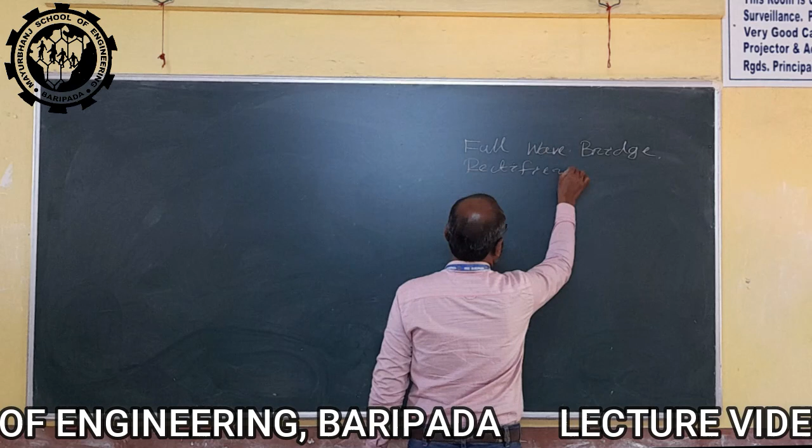Already we have discussed one kind of full wave rectifier, that is the full wave center tap rectifier. In spite of having one kind of full wave rectifier, we are going to discuss another one. Why? Because in that particular center tap kind of full wave rectifier, we have some sort of drawbacks. What are those drawbacks, we will discuss later on.

One major drawback I would like to bring before you is that in case of full wave center tap rectifier, during its construction, we have used a special kind of transformer called a center tap transformer. We require to construct a full wave center tap rectifier using this transformer.

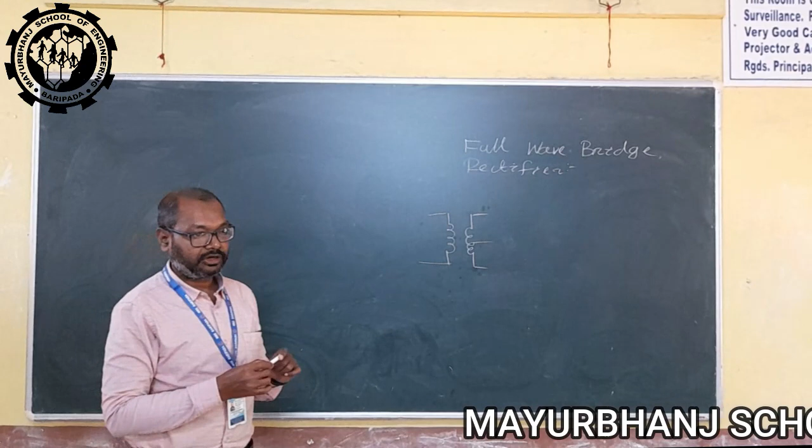In this center tap kind of transformer, we require a tap from the mid of the secondary winding of the transformer, which is quite difficult to manufacture. If we have a coil and anyone asks you to tap exactly from the center point of that coil and extract a point, it is quite difficult, because the coil is wounded.

It is wounded like a structure, and it is quite difficult to point out which point is actually the center point. If that center point is not found out properly, then on the secondary side we won't be able to get the same kind of voltage on either side of the tapping position. So for getting a perfectly centrally tapped position on the secondary side, we have to go through a very sophisticated process, which makes this transformer very expensive, so this kind of rectifier using the center tap transformer is not at all cost effective.

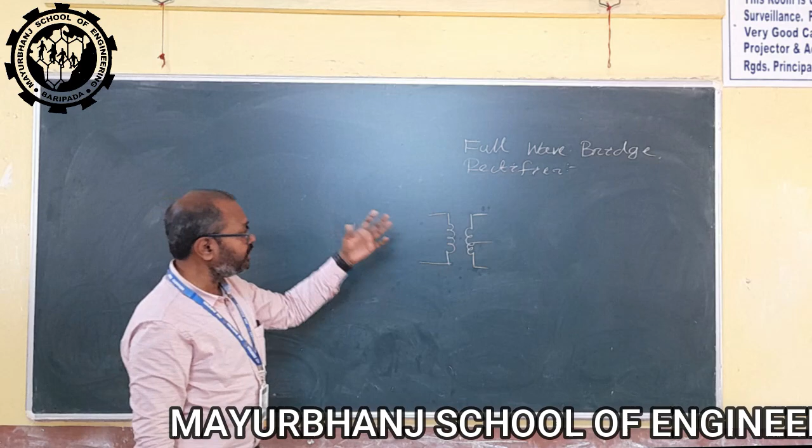For that reason, we are going for another kind of full wave rectifier, where we have to replace this center tap transformer with a normal transformer. So the objective behind this full wave bridge rectifier is to replace the center tap transformer from its construction. For this, we have to go through its circuit diagram, or you can say the constructional view.

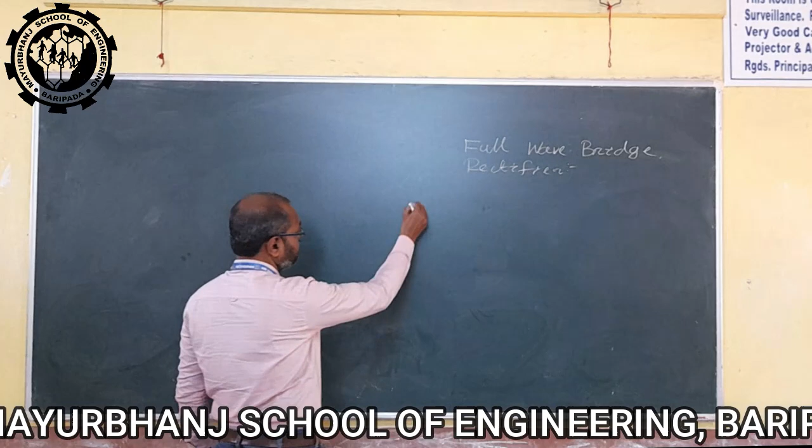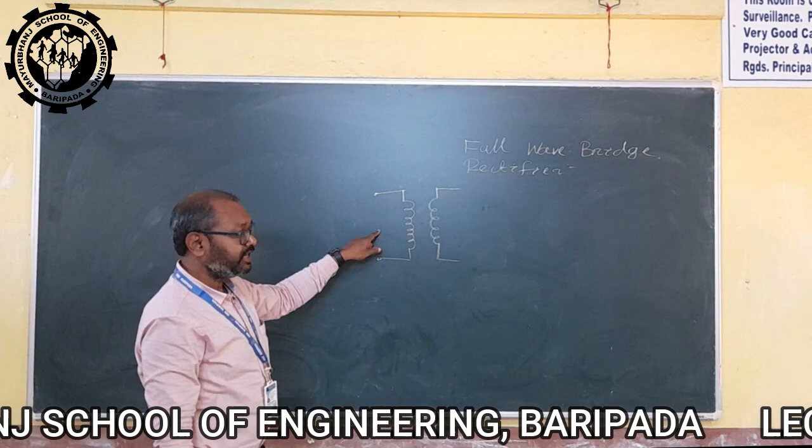Usually in a rectifier, in the first stage we have a step down transformer. In case of a step down transformer, whatever voltage we give in the primary side, we get a lesser voltage in the secondary side. Those transformers are called step down transformers. The relationship between the number of turns in the primary side is always greater than the number of turns in the secondary side of the winding. So this kind of transformer we have to use here. Let's say this is a step down transformer, we are using here.

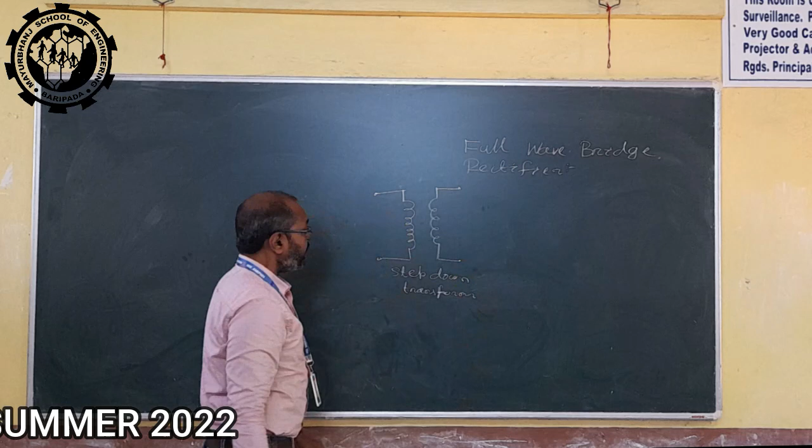Now this step down transformer has to be connected with a bridge. That bridge is constructed with 4 diodes, meaning the normal p-n junction diode. We have to use 4 diodes to construct that bridge. The bridge looks like this. See, these are the 2 positions, and here I have to draw the bridge of the diodes. These are the 4 positions.

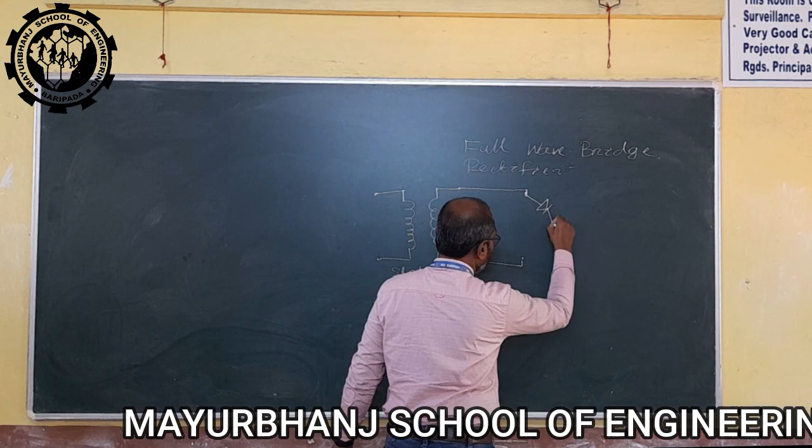Now the fashion of connection of these 4 diodes is like this. If I am connecting a diode like this at this particular point of the transformer, another diode I have to connect in the same direction.

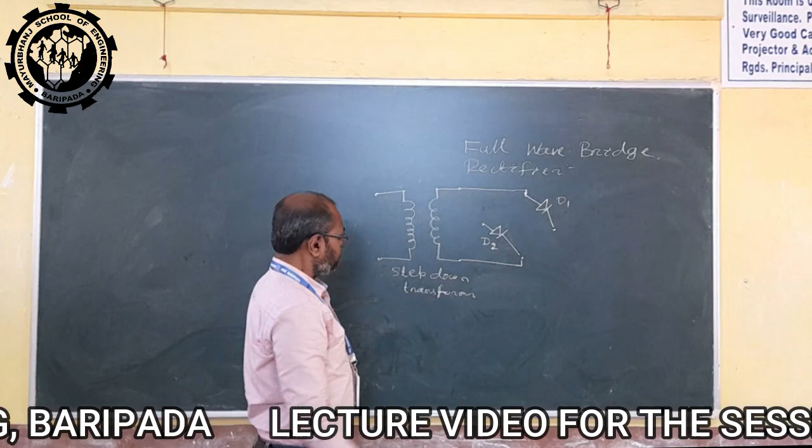Now, and I can put the name also, like this is D1 and this is D2. Then in the other two arms of the bridge, I have to connect two more diodes in the other direction.

And you just put the name, let's say this is your D3 and D4. Let's say this position is A and this is B.

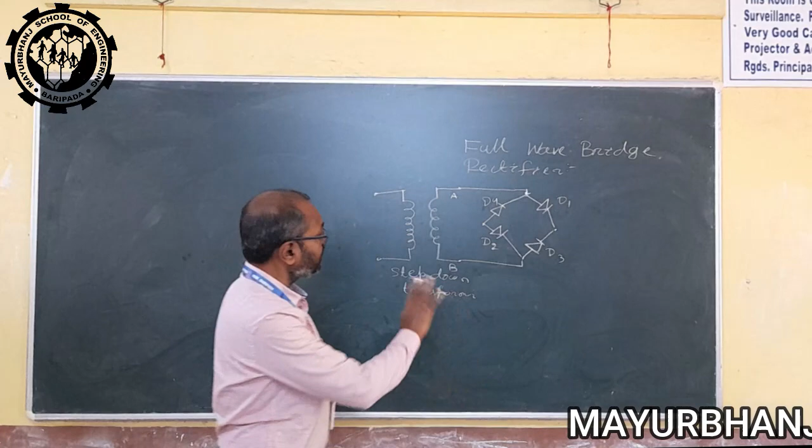So we can say this is the bridge rectifier overall, and now the primary voltage, whatever voltage we are applying here, this is an AC voltage. Let's say this is 220 volt or something like that, and 50 hertz.

The supply whatever we have, we have a step down alternating voltage here, depending upon the rating of the transformer. That may be 5 volt, that may be 12 volt, that may be 9 volt. But it depends upon the rating of the transformer.

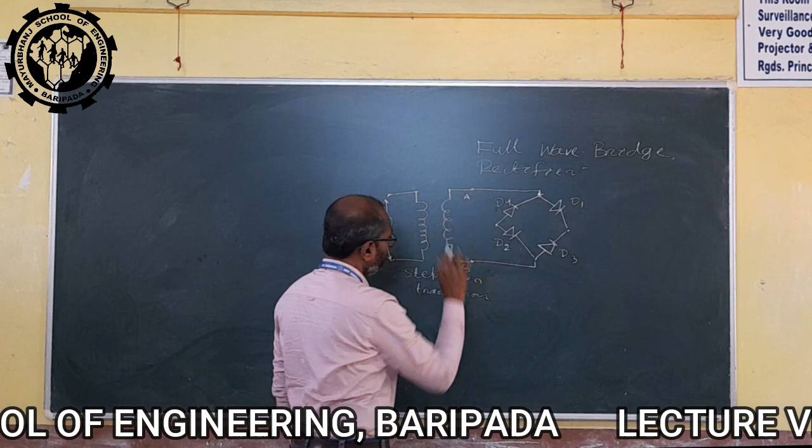Now, this step down AC quantity is available here between these two points A and B, which is applied in these two nodes of the bridge. Now, between these two nodes, I have to connect the load.

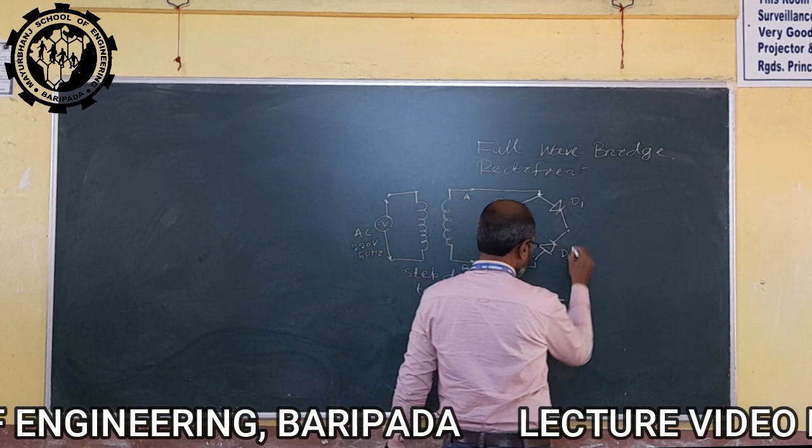Load means the rectified output that is meant for the load, which has been driven by this particular rectified output. This load has to be driven by this output. So let's say this is a resistive load and this is RL, named as RL.

Now this is the constructional feature. Here I have a transformer, step down transformer. This is the bridge, constructed by 4 diodes D1, D2, D3, D4. And between these two positions I am connecting the load, that is RL, that is resistive in nature.

Now this is the constructional feature, you can say the constructional view of our full wave rectifier, or full wave bridge rectifier. Here we are replacing the center tap transformer. We are not using the center tap transformer here.

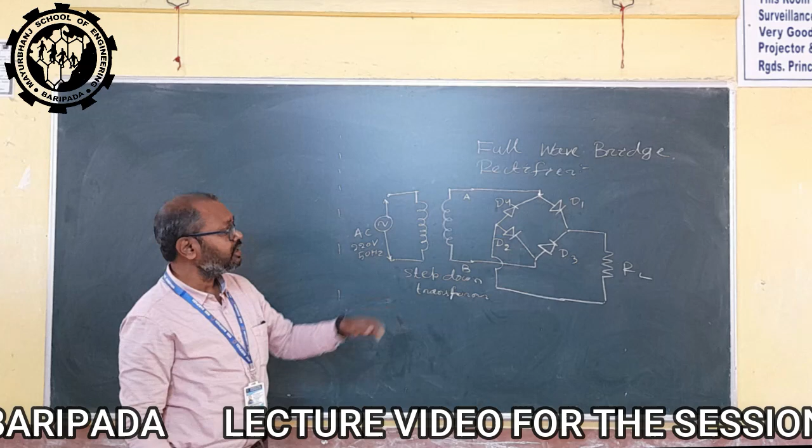But we are taking two more diodes, we are using two more diodes. If we compare the cost of two diodes, then that is very nominal.

And if you compare the cost of the center tap transformer and the cost of two additional diodes, we can find that using two more diodes is quite cost effective as compared to using a center tap transformer for constructing a bridge rectifier. So in this case we can say this is a cost effective option and it works in a better way.

And one more thing we can say, this circuit is a little bit complicated because two more diodes are available there, but we can memorize that connection pattern and we can exactly draw it on our papers.

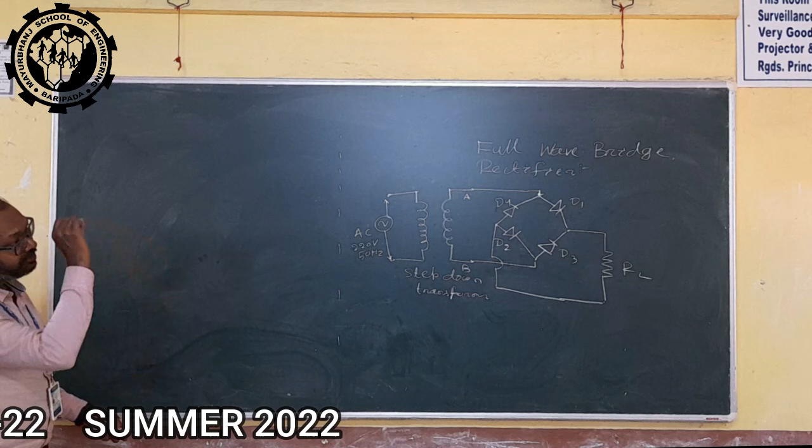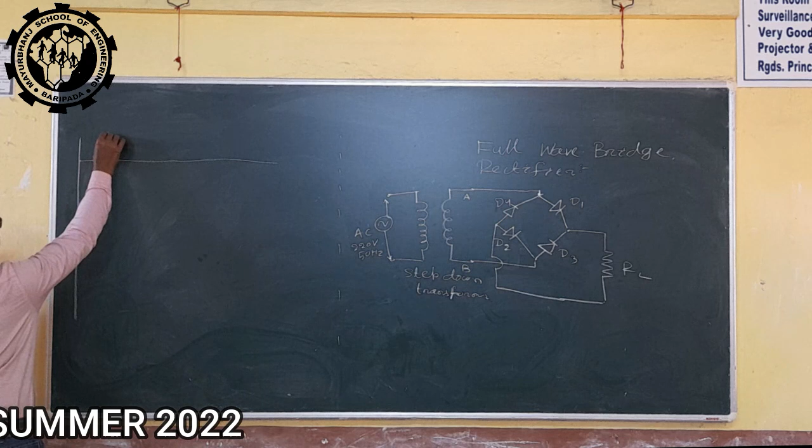Okay, now we have to move to the waveform, or you can say the working principle of this particular bridge rectifier. Now during the discussion of this bridge rectifier, we have to take the help of these sinusoid waves, or the alternating quantity, to analyse what is the pattern of output we are getting across the load, what actually we are applying and what actually we are getting.

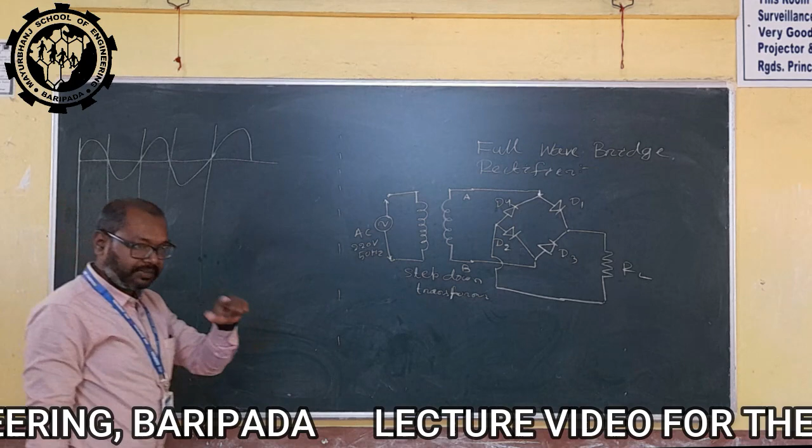Okay, now in this case, let's say I have an alternating quantity like this, or you can say an alternating current. Now we know very well that one particular quantity is said to be alternating if it is a time varying quantity. If it is a time varying quantity, its value will be changed according to the time, its amplitude as well as direction. It will change its amplitude as well as its direction.

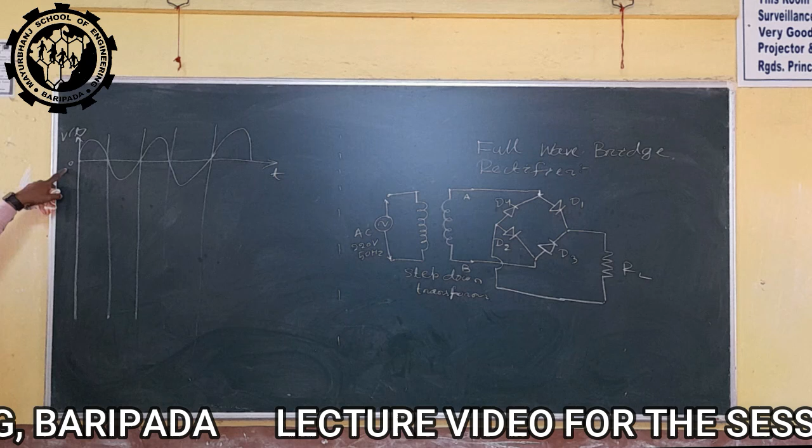Now if we analyze this signal, or if we consider this signal, let's say this is your time axis and this is a voltage signal V of t, and with respect to this time, let's say it starts at 0. From this to this, the level of the voltage is getting changed. From 0 to this particular position it will attain its maximum value, then it will come again to 0. And from this position it will alter its direction.

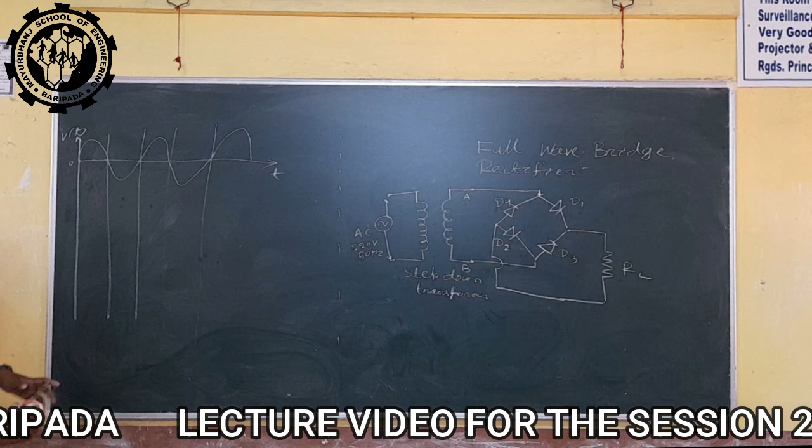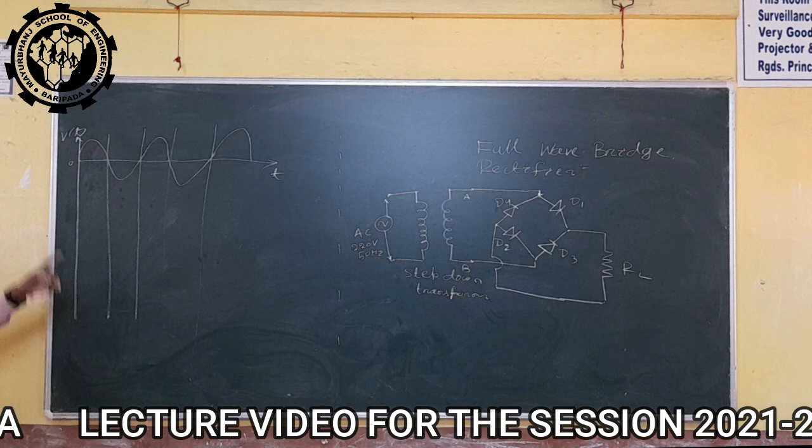Okay, so in this case we can say this particular quantity will alter its amplitude as well as its direction. That's why it will be considered as an alternating current, or alternating voltage, or alternating quantity. Otherwise you cannot say that is an alternating quantity. Both the changes will be reflected over there in its waveform, voltage or amplitude, as well as the direction.

Now this particular voltage, let's say applied here in this transformer, and we get a step down kind of output here, and that is also alternating in nature. This step down voltage is fed to these two positions, these two points of this diode bridge. Now when this particular step down and alternating quantity appears here across these two positions, what happens? This we have to analyze.

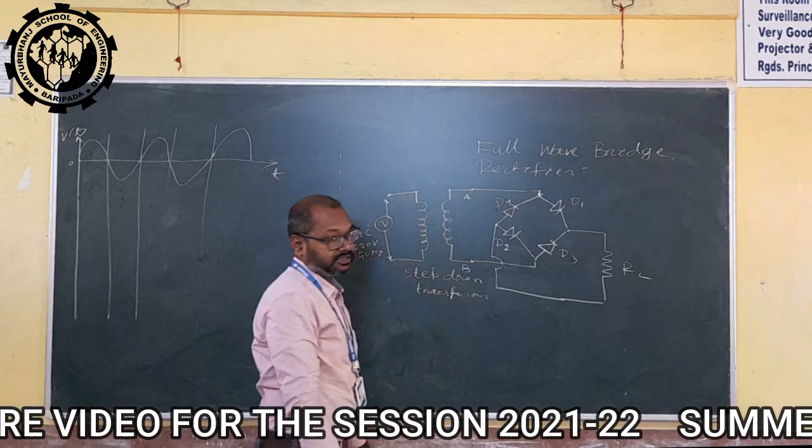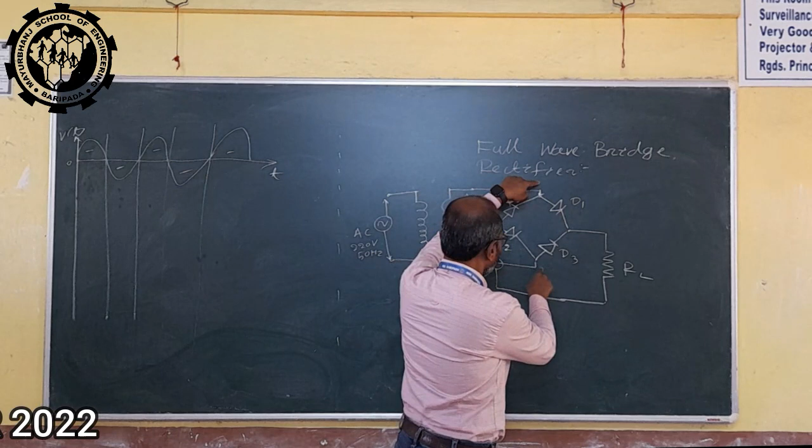See, this step-down alternating quantity has a positive half cycle, and again has a negative half cycle. Then it is again positive, then negative, then positive, and it will continue. Now for a particular instant of time, we can say it will approach these two positions with a positive voltage, and at the very next instant of time, at these two particular points we will get a negative voltage, isn't it?

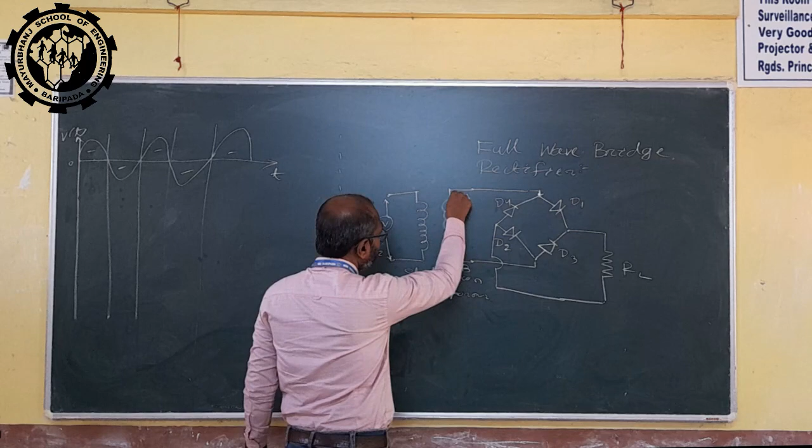So for the positive half cycle we can say node A becomes positive, and node B becomes negative, and this particular voltage appears here. Now at the negative half cycle we can say node A becomes negative and node B becomes positive, as it will change its direction.

So now what happened here? During the positive half cycle, the positive voltage appears here at A, and it is negative at B.

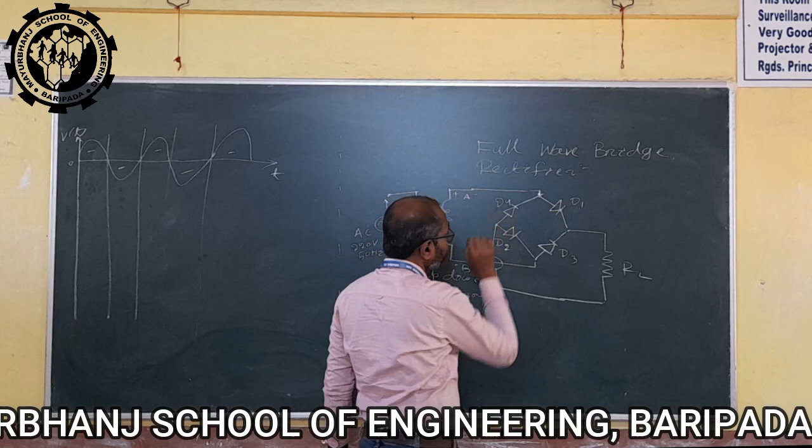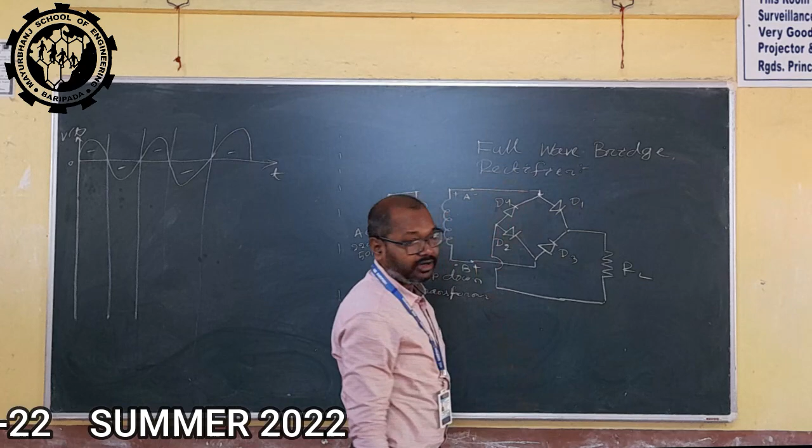Now when it becomes positive, if we take these two diodes into consideration, the anode of diode D1 is connected to this particular point and it will experience a positive voltage. But the cathode of diode D4 is connected to the same node. Now here the cathode experiences a positive voltage. So when the anode of diode D1 experiences a positive voltage, the cathode of diode D4 also experiences a positive voltage.

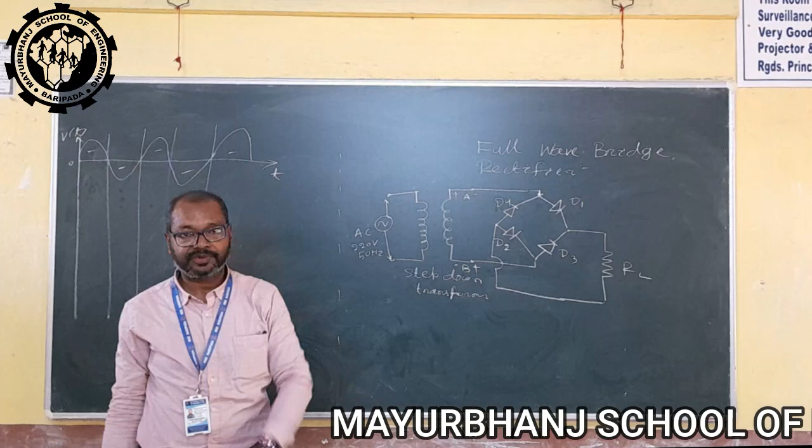So by taking this case into consideration, at this particular time, diode D1 with respect to this positive voltage becomes forward bias, whereas diode D4 becomes reverse bias. And we know during forward bias, a diode behaves as a short circuit. So the current, whatever voltage is available here, will start to conduct through diode D1, and diode D4 behaves as an open circuit.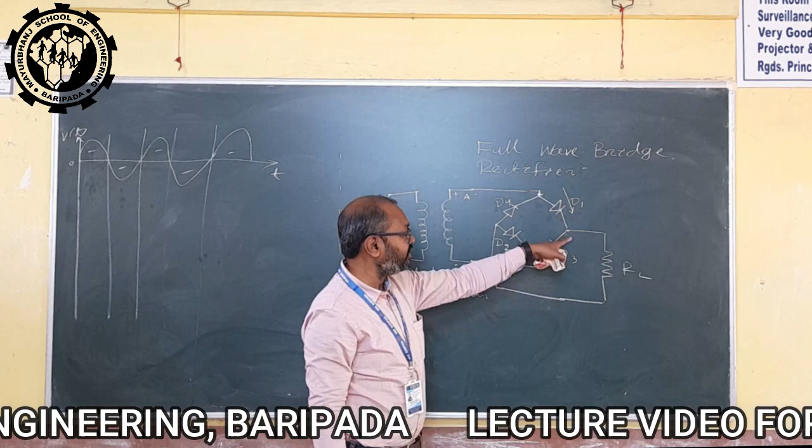Now this particular current arrives here. When it arrives here, it finds that the cathode of diode D3 is connected to this position, and since the cathode of diode D3 is connected to this position, diode D3 becomes reverse bias and possesses infinite resistance, or behaves as an open circuit. So when diode D3 behaves as an open circuit, the current will start to flow through the load resistor and continue this path up to this node.

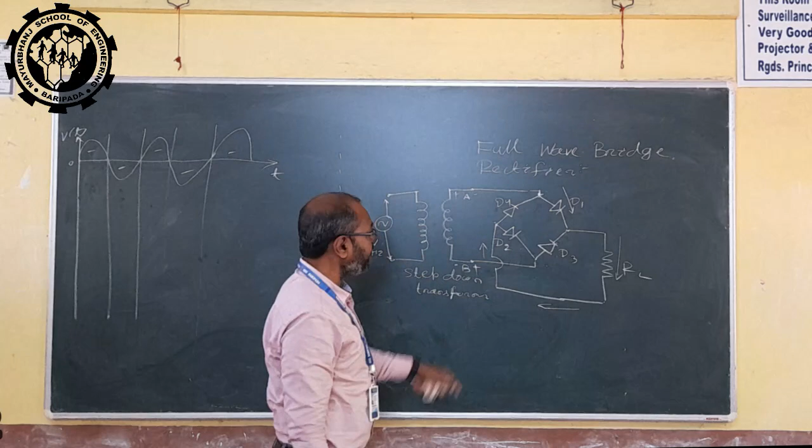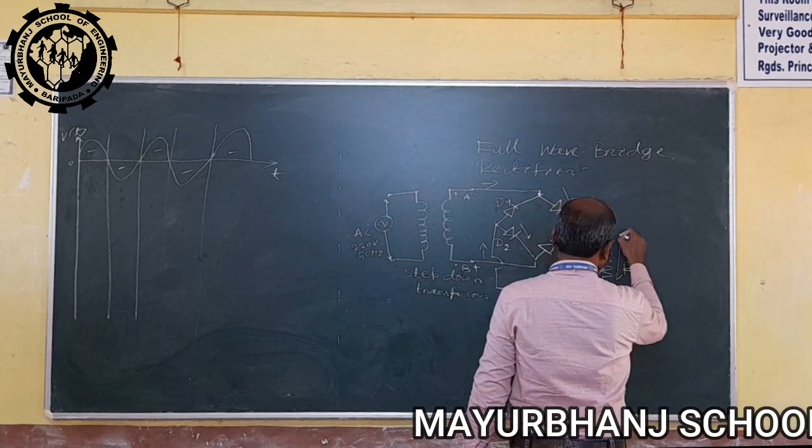Now when it arrives at this node, the current will start flowing from here. The current started from here, and from this it will go through D2 and arrive at point B. Now the circuit gets completed. The current started from the positive terminal and ended at the negative terminal, and the current completes its path, and we can get a direction of current through this load, that is, in this direction.

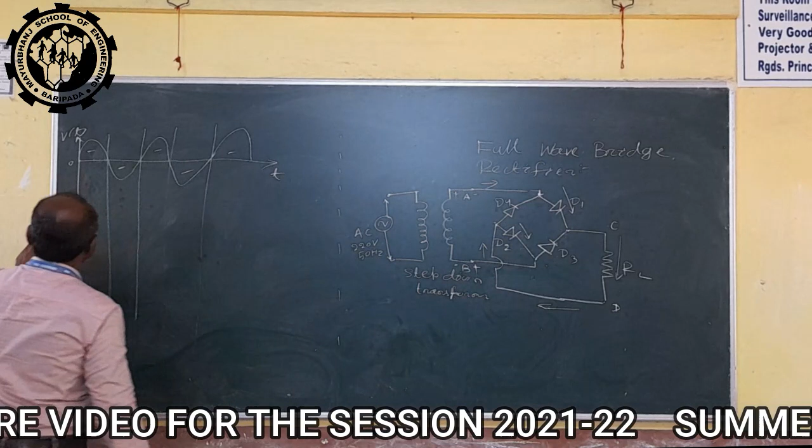Let's say we put some names here — let's call this C and this D. From C to D we are getting the current, in this direction, and this is for the positive half cycle. And if we take the waveform for the output, or the current flowing through the load, or the voltage drop across the load for the positive half cycle, it will be in phase, or you can say it will follow the same direction, and we will get the same output here. Now come to the negative half cycle.

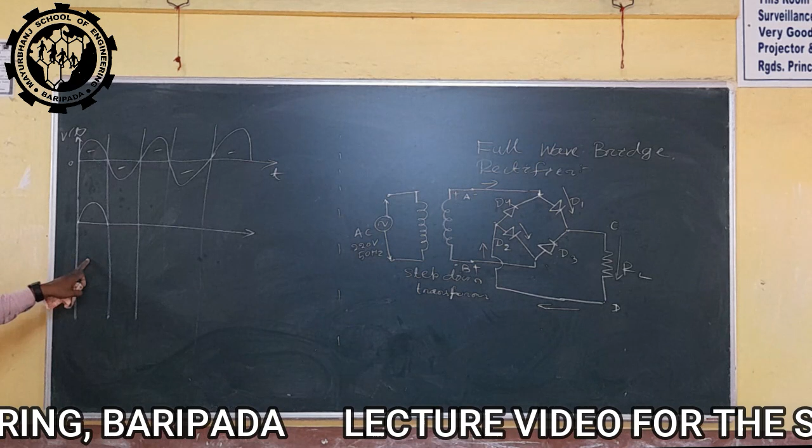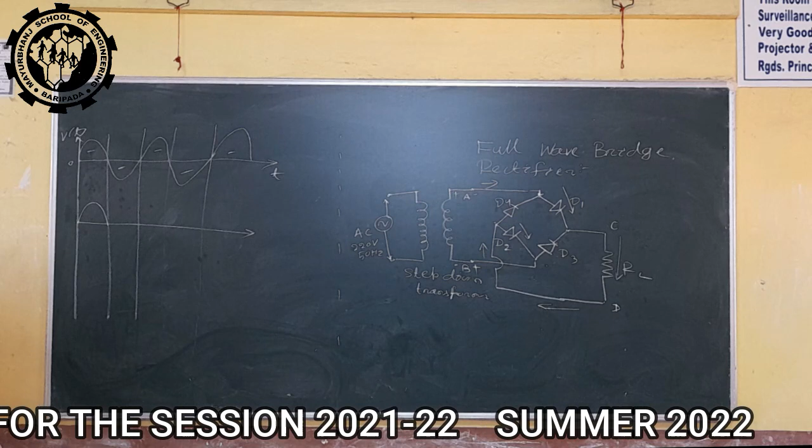During this negative half cycle — you all understand this, na? This same thing is already discussed in the half wave rectifier also. Why? Not only in the half wave rectifier — this is because of the nature of the diode. A diode conducts when it is forward bias, and a diode will not conduct when it is reverse bias. And we are finding that during this positive half cycle, diodes D1 and D2 are forward bias, and D4 and D3 are reverse bias.

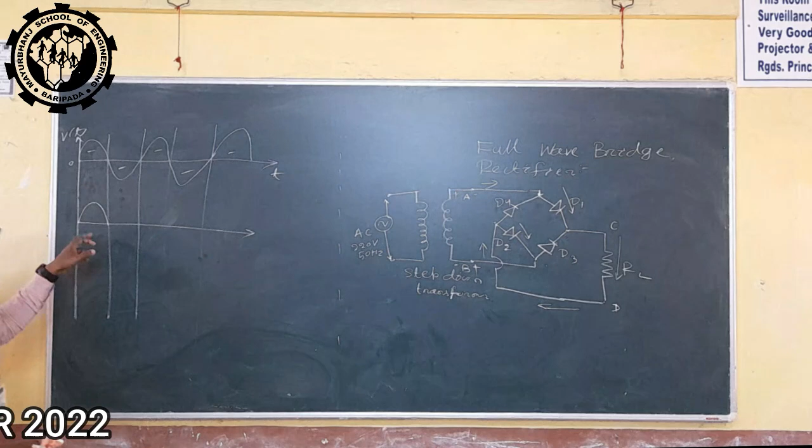That's why current is flowing in this direction, from C to D through the load, and we are getting the output waveform like this.

Now when we move into the negative half cycle of the input waveform, node A becomes negative. If point A becomes negative, definitely we have to consider B as positive, since the other end of the transformer behaves as the opposite terminal.

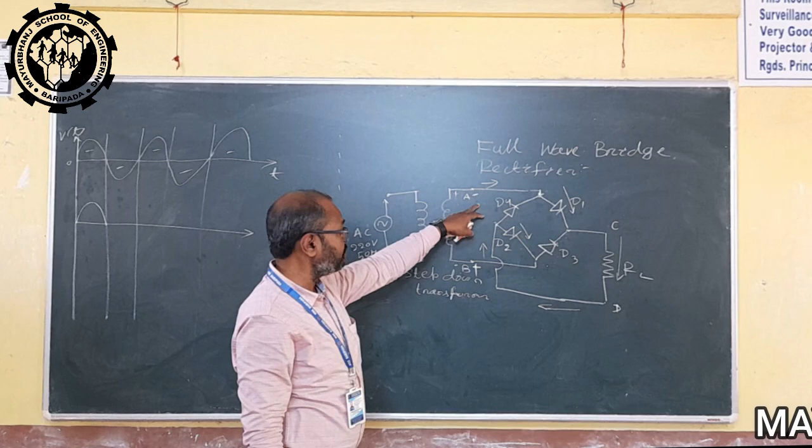So when terminal A experiences a negative voltage, at that same instant terminal B will experience a positive voltage. Taking these sign conventions, A is negative and B is positive. During this negative half cycle, this positive voltage approaches this node and this negative voltage approaches this node.

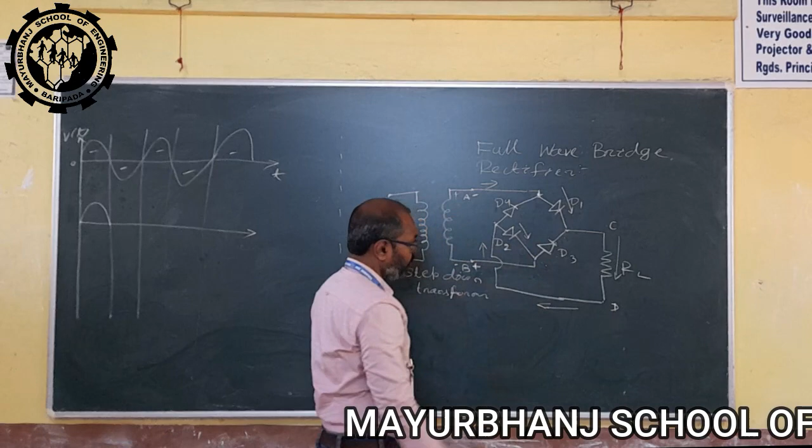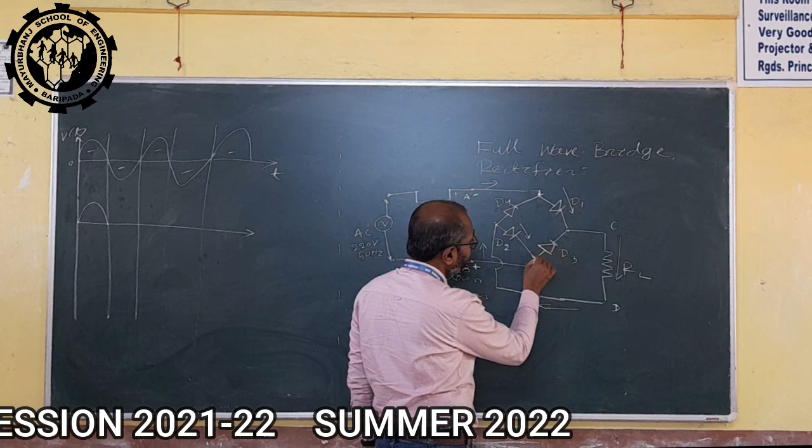So when positive voltage appears here, what we observe is that the anode of diode D3 is connected to this position, and the cathode of diode D2 is connected to this position.

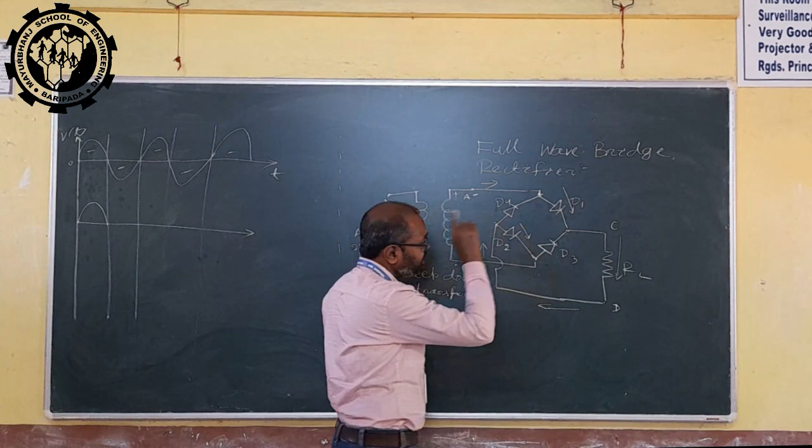Taking into consideration that the voltage here is positive, we can say that diode D3 becomes forward biased because its anode experiences a positive voltage, and the cathode of diode D2 also experiences a positive voltage.

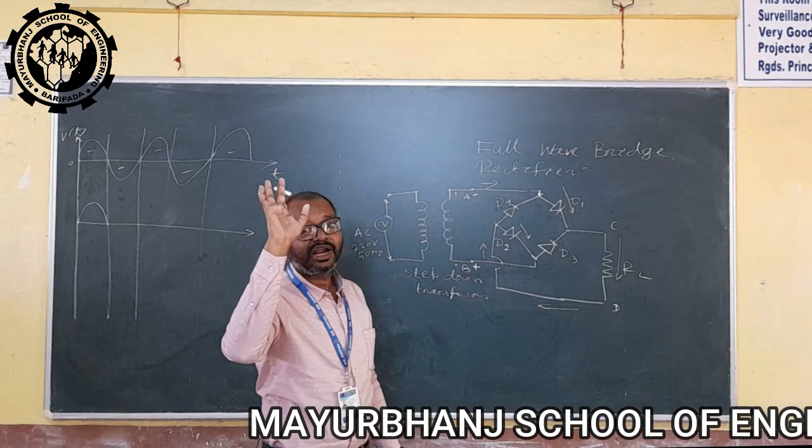Now, cathode of D2 experiencing a positive voltage means diode D2 is reverse biased. Reverse bias means it becomes open circuit, while diode D3 being forward biased means it conducts, behaving as a short circuit, and current starts flowing through it.

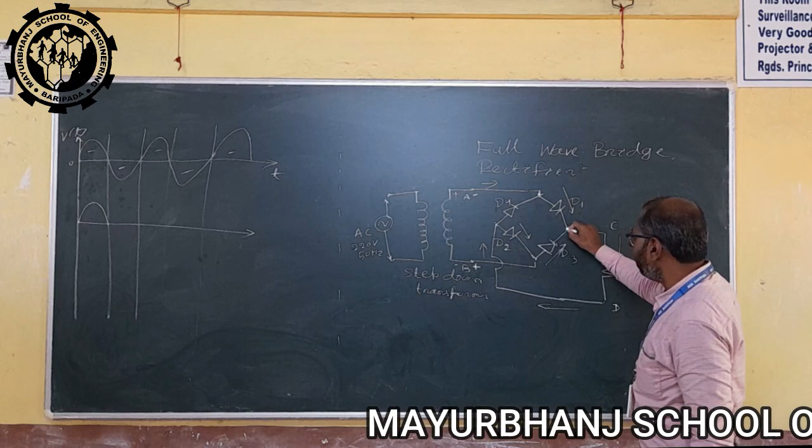Current starts flowing through this because of this negative half cycle. Now this current, because of the negative half cycle, when it approaches this node, what actually happens?

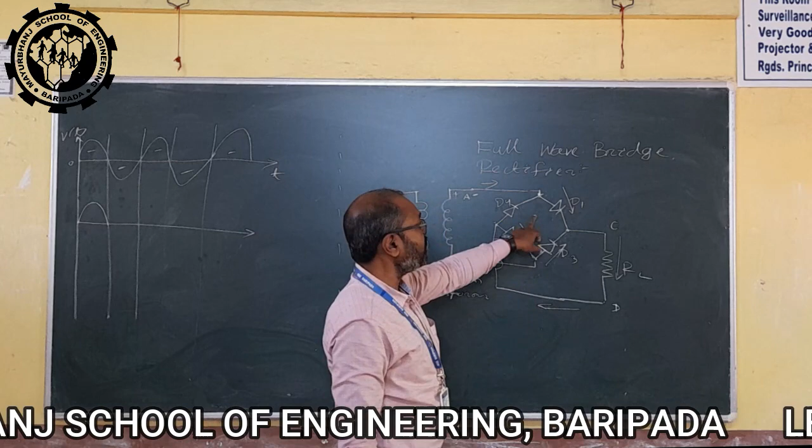The cathode of diode D1 is connected to this position, so D1 again becomes reverse biased. If diode D1 becomes reverse biased, it again behaves as an open circuit.

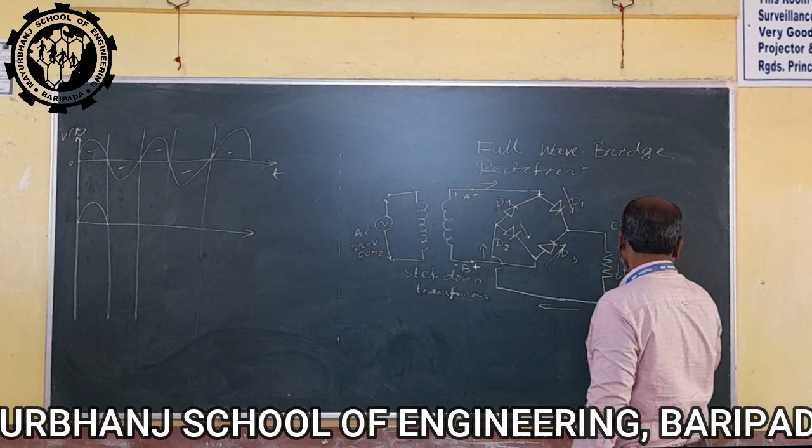So if diode D1 behaves as an open circuit, current will not flow through this direction. Rather, current starts to flow in this direction and flows through the load, then continues up to this node.

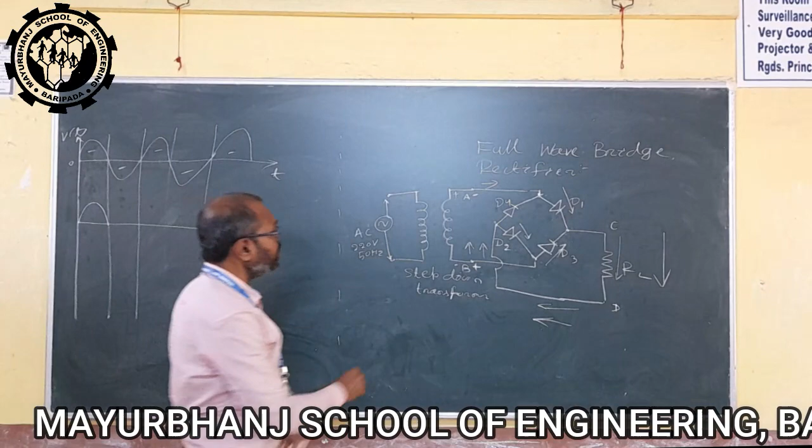When current arrives at this position, it again finds that diode D2 is reverse biased, as previously analyzed. So it flows in this direction and approaches node A. It started flowing from node B during the negative half cycle and ended at node A, completing the circuit.

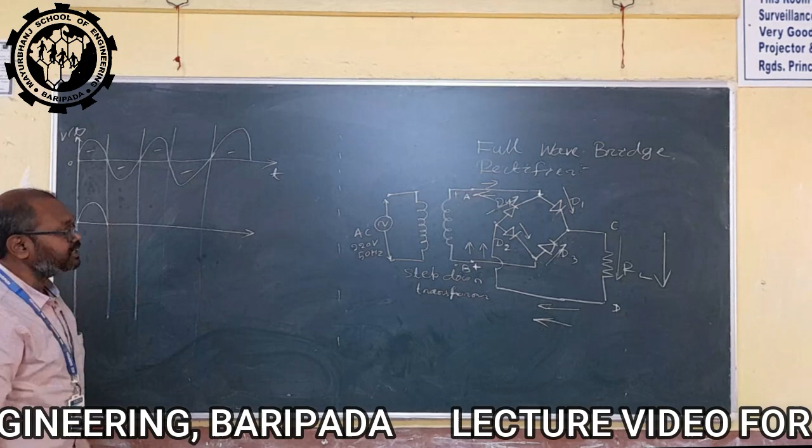Now what happens in this case? If we observe the direction of current through this load because of this negative half cycle of the input, it is again in the same direction, from C to D.

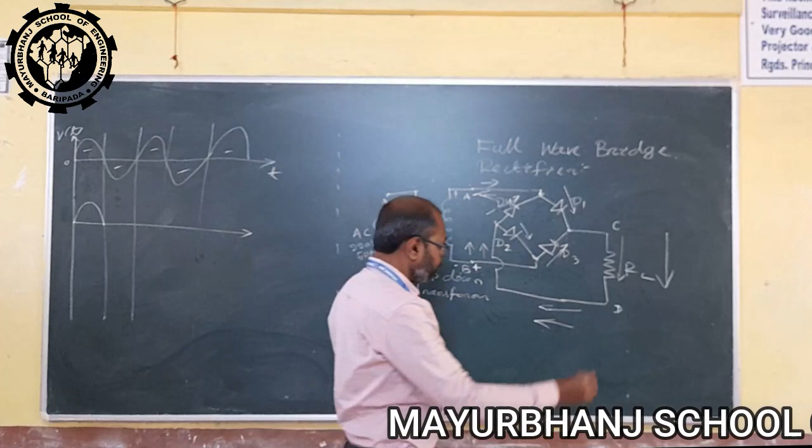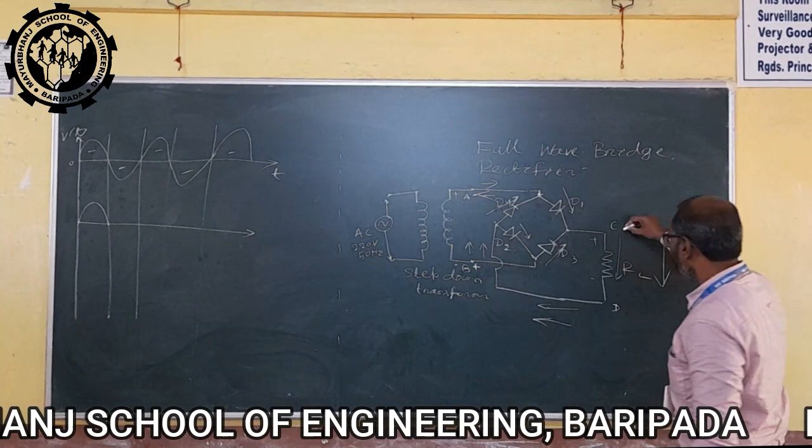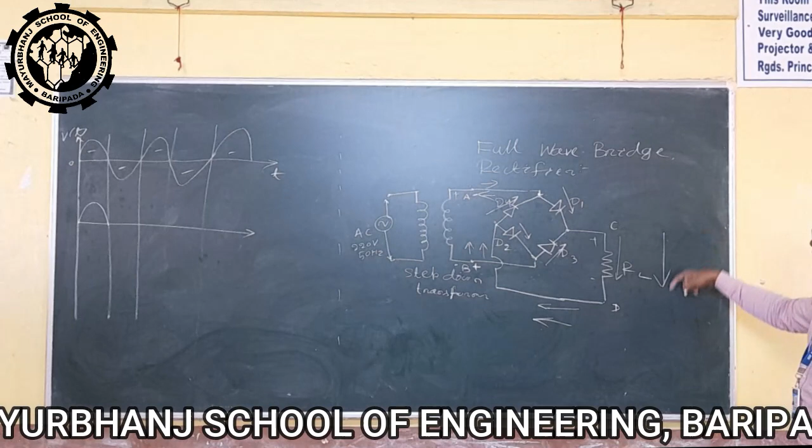So in the general convention of KVL and KCL, the entering point of current is considered positive and the leaving point is considered negative. The sign convention for current flowing through both half cycles is the same. For the positive half cycle, current flows from C to D, so this is positive and this is negative. The current flowing through the load during the negative half cycle is also from C to D, so current enters at point C and leaves at point D, same as what we observed for the positive half cycle.

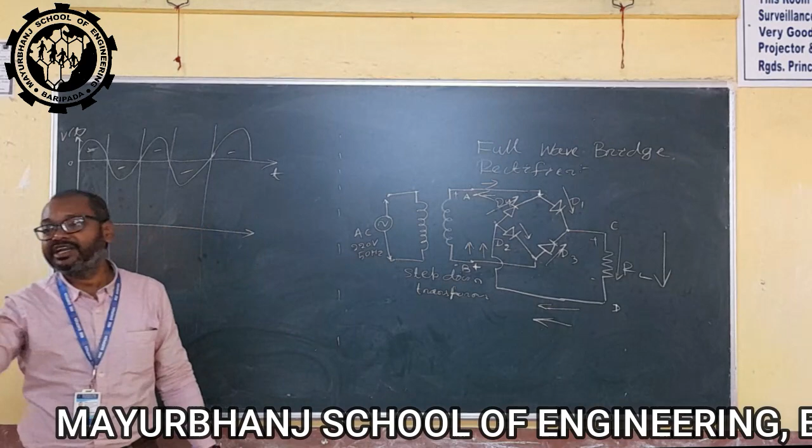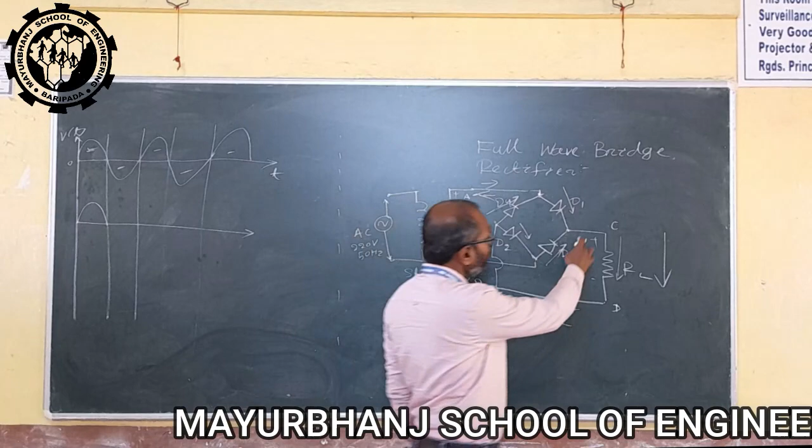So we can say there is no more change in direction. When we plot the output waveform for the negative half cycle, just as we got a waveform like this for the positive half cycle, we find there is no alteration of direction during the negative half cycle.

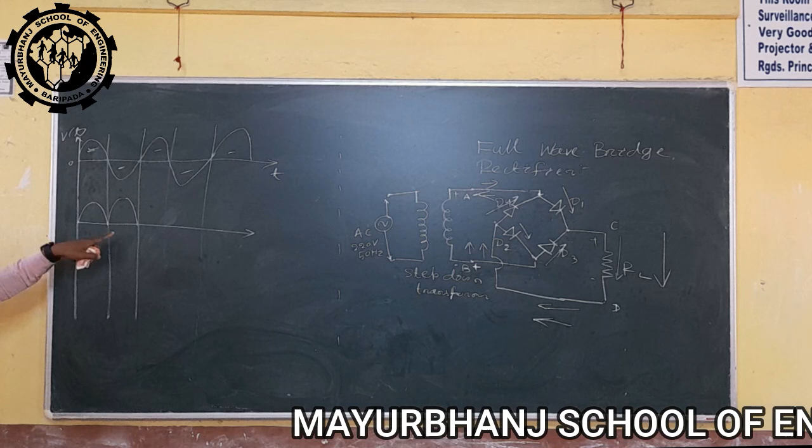If there is no alteration of direction, we can form the waveform like this in the negative half cycle. Because for the positive half cycle, it enters at C and leaves at D. For the negative half cycle also, it enters at C and leaves at D. So there is no change in direction, and we get the waveform like this.

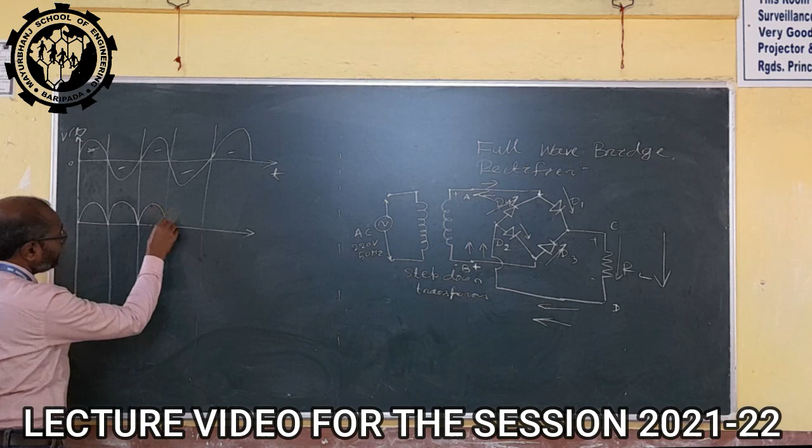So this is for the negative half cycle. After this negative half cycle, again we get the positive one, and the waveform is like this. After this, positive half cycle, again negative half cycle is there, and for this negative half cycle also we get positive voltage. Again after positive and negative, we get the positive one. So by analysis, this is the output.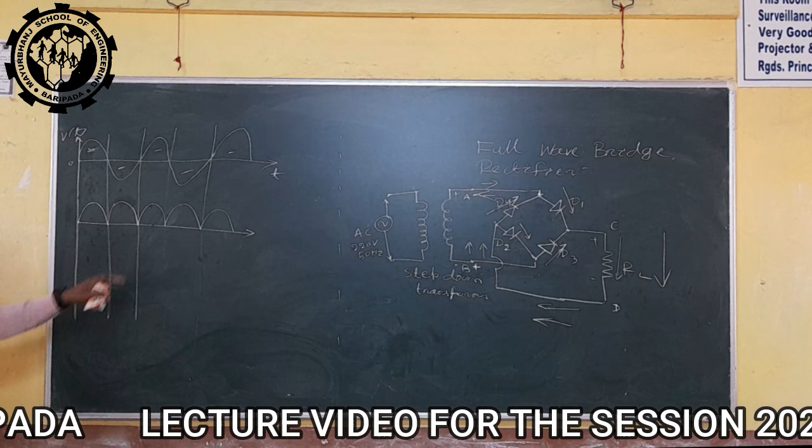If you consider this as an input, this is your rectified output. This is also output voltage. Let's say this is VI of t and this is VO of t, and this is step down AC voltage, and this is your rectified output voltage.

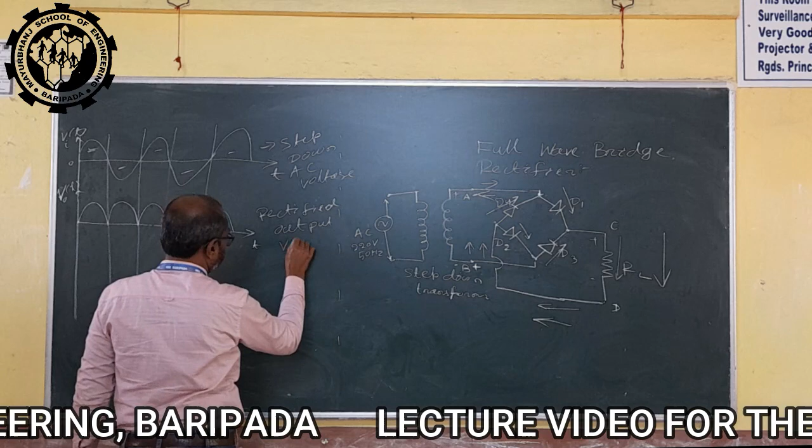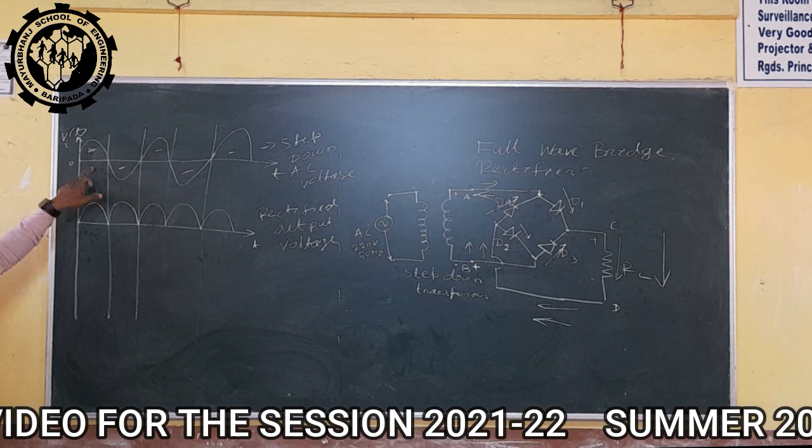So if we compare these two waveforms, what we are finding is the variation in voltage, from the amplitude point of view, is there in the output also. The variation in voltage, or you can say amplitude, that is there in the input, and also available here in the output voltage.

But there is no alteration in direction in the rectified output. If there is no alteration in direction, then we cannot say this waveform is an alternating quantity. Now this is a form of DC, but this is not pure DC. Some AC ripples are there, and because of that, this is considered as pulsating DC, or PDC.

This is regarding what? This is whatever input we are providing to the bridge rectifier, and this is the output we are getting from the bridge rectifier. Now, in this case, we can say for the positive half cycle,

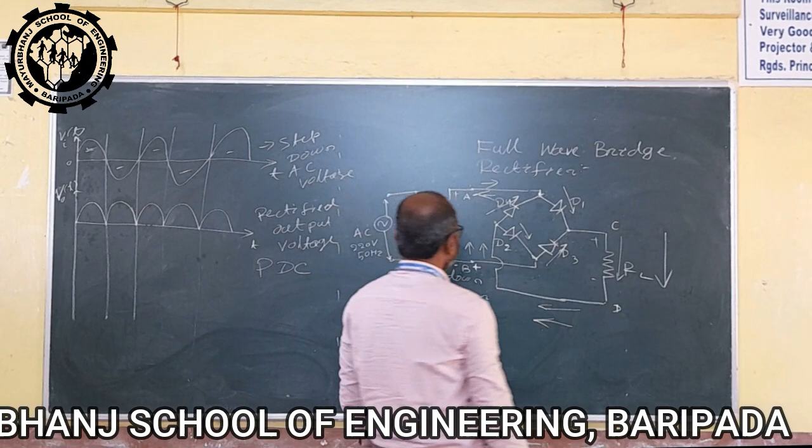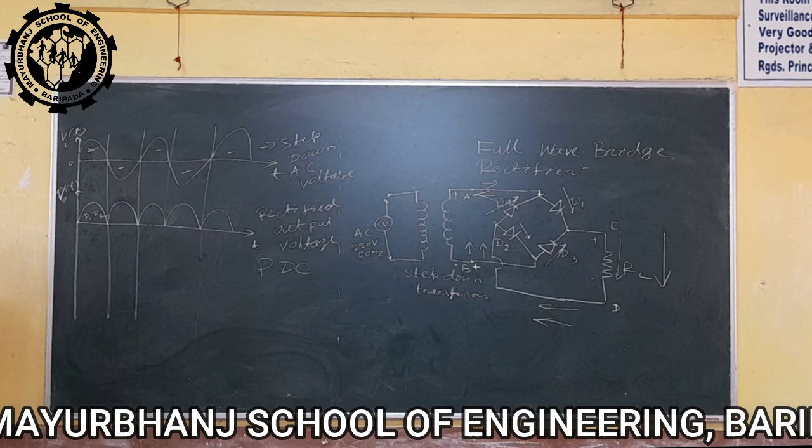diode D1 and D2, these two become forward bias. So for this particular waveform, we are getting it for diode D1 and D2, and D3 and D4 reverse bias. For the negative half cycle, diode D3 and D4, these two become forward bias.

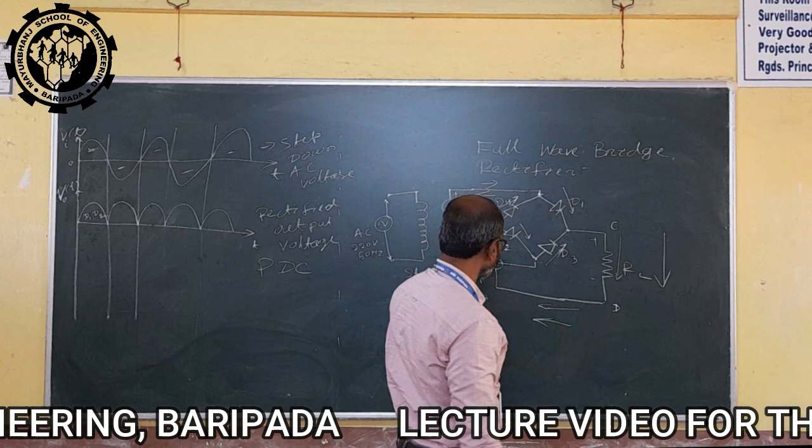For positive half cycle, diode D1 and D2 become forward bias, and current conducts in this particular fashion, okay, like this.

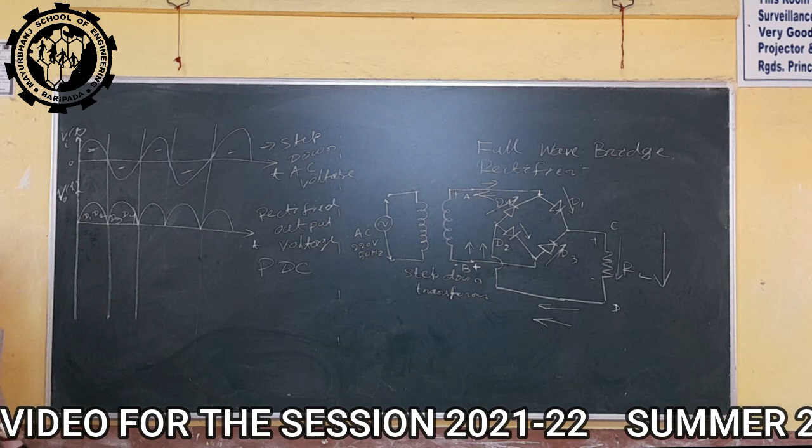And for negative half cycle, diode D3 and D4 become forward bias, and this particular fashion continues. Here D1 and D2 become forward bias, here D3 and D4 become forward bias, here D1 and D2 become forward bias, next D3 and D4 become forward bias, and this will continue.

In this particular case, we can say for one half cycle, one pair of diodes becomes forward bias. For the next half cycle, it will become reverse bias. Right?

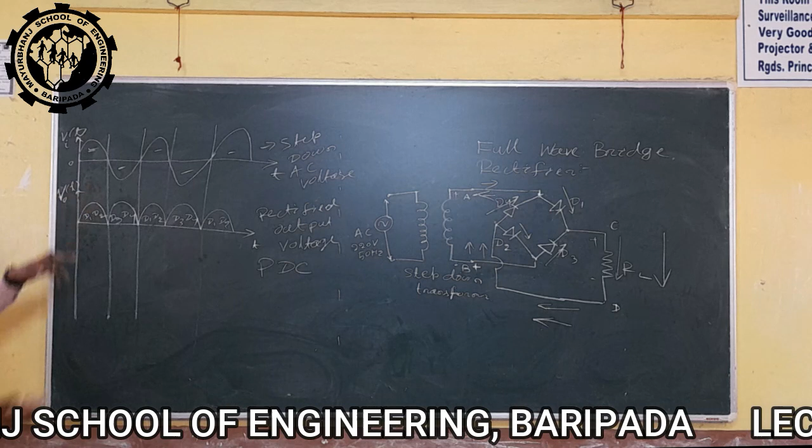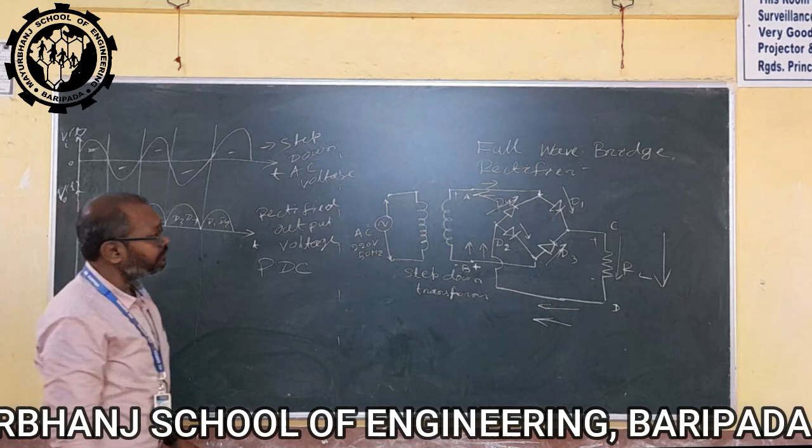For this positive half cycle, diode D1 and D2 become forward bias, but for the other half cycle it becomes reverse. For this half cycle, diode D3 and D4 become forward bias, but for this, it becomes reverse. That's why the flow of current through this load becomes unidirectional.

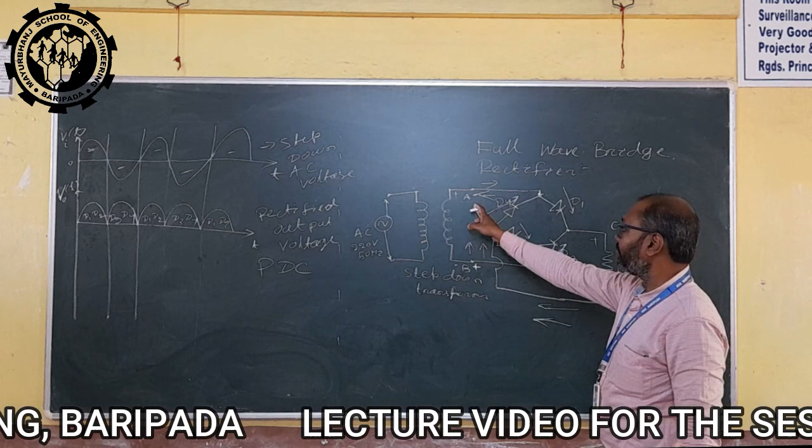For the positive half cycle, it flows from C to D. Same for the negative half cycle, it flows from C to D. Though the current starts to flow from A during the positive half cycle, and starts to flow from B during the negative half cycle, when both currents approach the load, they flow from C to D.

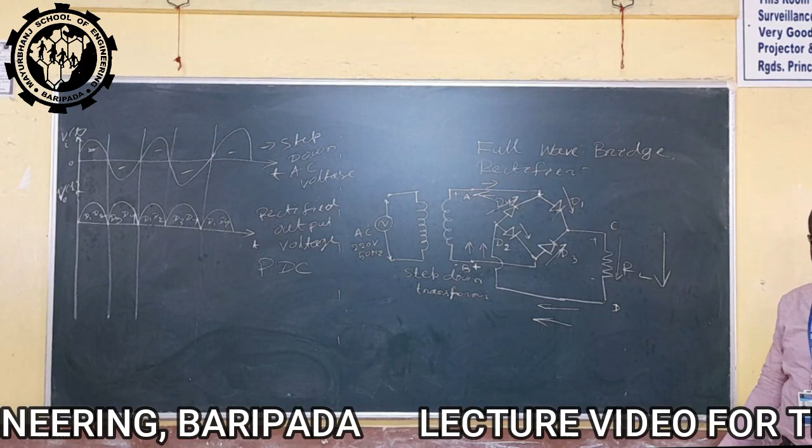During the negative half cycle, current flows from B to A. During the positive half cycle, the current flows from A to B. For this particular bridge, the current through the load becomes unidirectional. For positive half cycle, it goes from C to D, and for negative half cycle also, it goes from C to D, so the alteration of direction is cancelled here.

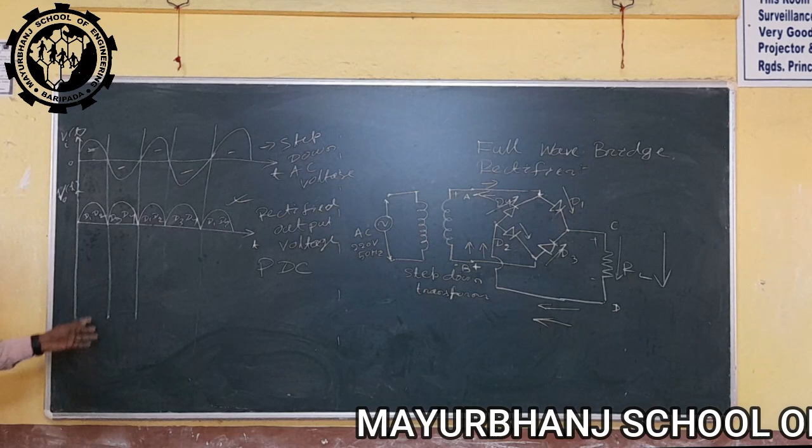No alteration of direction is available here during this rectified output, and we get a pulsating DC from the bridge rectifier. This is regarding the working principle of the bridge rectifier, and this is its constructional view. I hope you all understand. Okay, thank you.